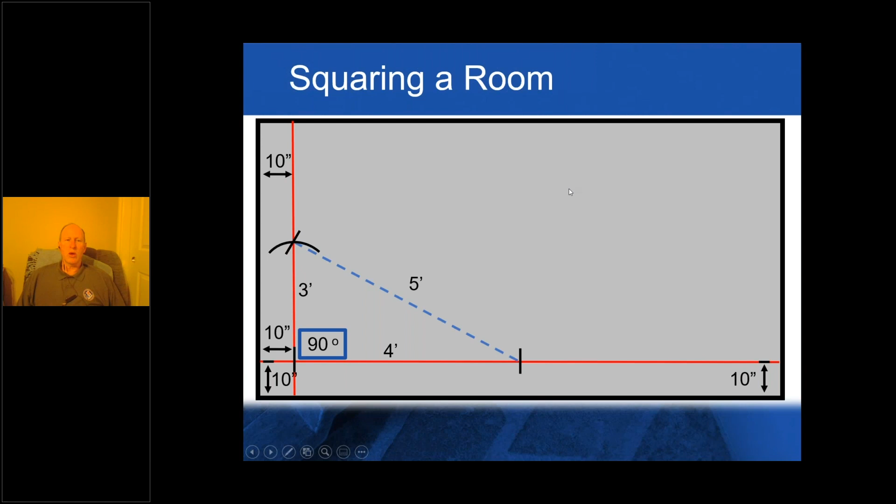Now, if this was a huge room like a mall, it could be 30, 40, 50, or 300, 400, 500. Or 6, 8, 10, any multiple of 3, 4, 5. Usually you want to go the biggest multiple you can fit. You don't want to go 3 foot, 4 foot, and 5 foot if you've got 100-foot long lines going in both directions. You want to get as far out as possible, and that'll make you even more precise in your lines being square. So now we've got our line square, and we can measure off of that square line.

So we checked down that short wall when we made our very first 10-inch marks to make sure that wall was straight. And guess what? That one is nice and straight. When we measure across the room from both ends, that wall is 84 inches. Then we can do the same thing off of the other 10-inch mark, measuring from short end of room to short end of room. At the top, we're 119 inches. And at the bottom, we're 120. That's an inch difference. If that worked out full tile at the top of the room, and we worked our way back towards this bottom right-hand corner, we would have a 1-inch sliver.

It would start off as 0, and we would start off with little slivers getting bigger and bigger till a 1-inch sliver. That would look horrible, because what we're looking to do is we want to be centered and balanced.

So how does this help us? We know if the room's square, we can adjust our cuts to make sure we have equal size cuts on both ends and both long sides, keep our cuts equal, keep our cuts balanced.

So if you were to come up with a 1-inch cut at the far end, obviously we would need to shift our pattern. If you had started with a full tile and ended up with a 1-inch cut, say this was a 12 by 12 tile, all you would have to do is start with a 6 or 6.5 inch. And when you got to the other end, guess what? You'd have about a 6 or 6.5 inch down there as well.

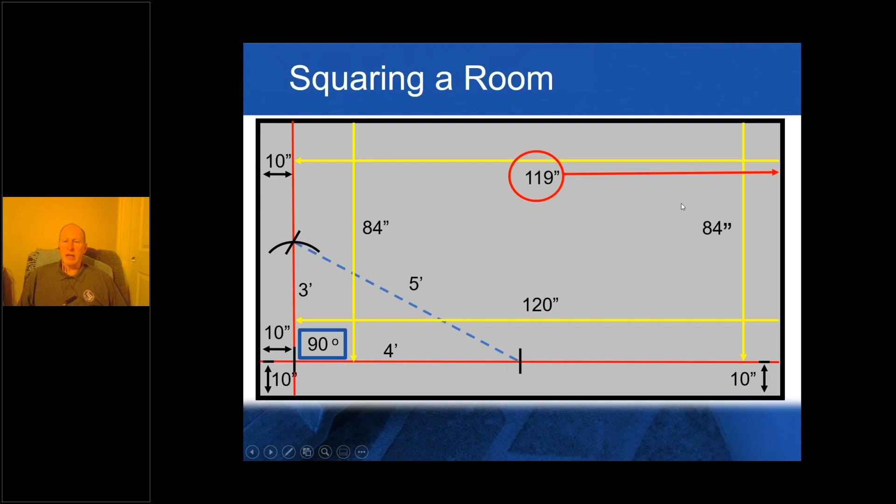Then you would be centered and balanced, and that's per our ANSI standards and our TCNA handbook. Those are the industry standards for when we do our layout. It needs to be centered and balanced.

So that's also a good way to make sure that our laser is working. We can check our laser, make sure it's still focused and shining at exactly a 90-degree angle. Because sometimes if you trust it every time, as you start to lay tile something's not quite working right. Maybe the laser's been dropped, the helper dropped it and surprise, they didn't tell you about it. So make sure that every once in a while, you check your laser.

So if we're going to use a laser, we've got to make sure we have our charger with us. Many times you need batteries, extra batteries. So you get out to a job, guess what? You don't have any more AA batteries in the truck. So now either you're not going to use your laser, or you're taking a quick run to town to go pick up some batteries. Time killers.

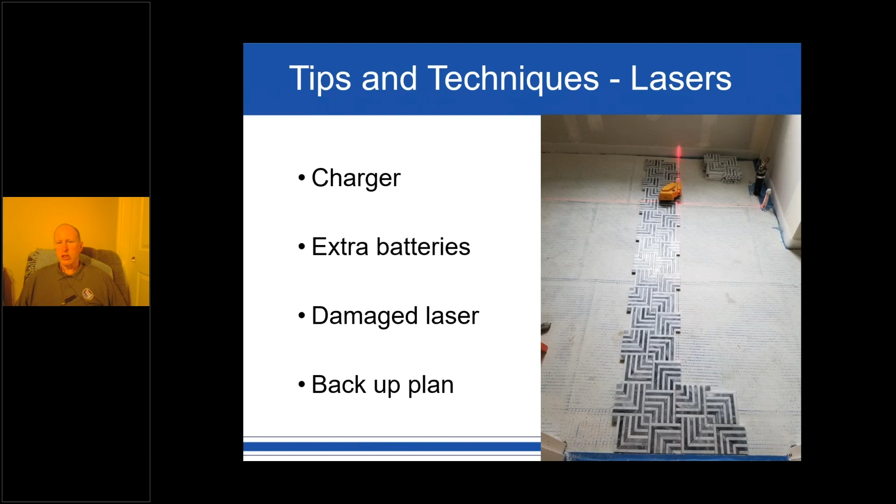What happens if the laser got damaged? What's your backup plan? Well, that's what the 3-4-5 method would be. That would be your backup plan and a way to check your laser. You'd use your 3-4-5 and you'd be able to snap out your lines.

So we need to make sure that we square up a room, establish our square, make sure everything's straight, and then we work from there. That's how we check rooms out.

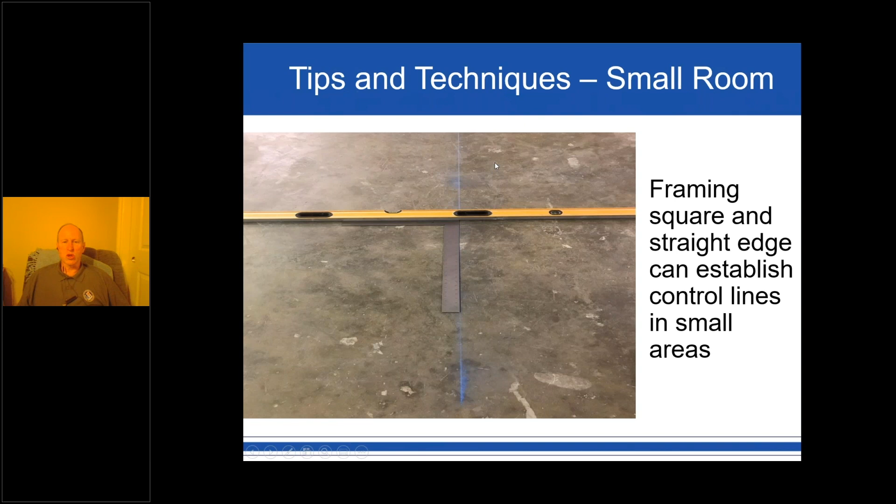If we made our lines in the middle of the room, like I was talking about earlier, and then laid our tiles, say this was an 8'6" by 8'6" room, if you started dead middle and laid 4 full tiles, you'd end up with a 3-inch cut. Well, back to our standard: what's our standard? Half or larger. So what would you do?

Now, sometimes it's going to get more difficult depending on the configuration of the room, how many different walls, hallways, and things like that you have to deal with. But this is the standard we work from, and we try to balance our layout the best to give us the best look overall. So that's the way we can do that.

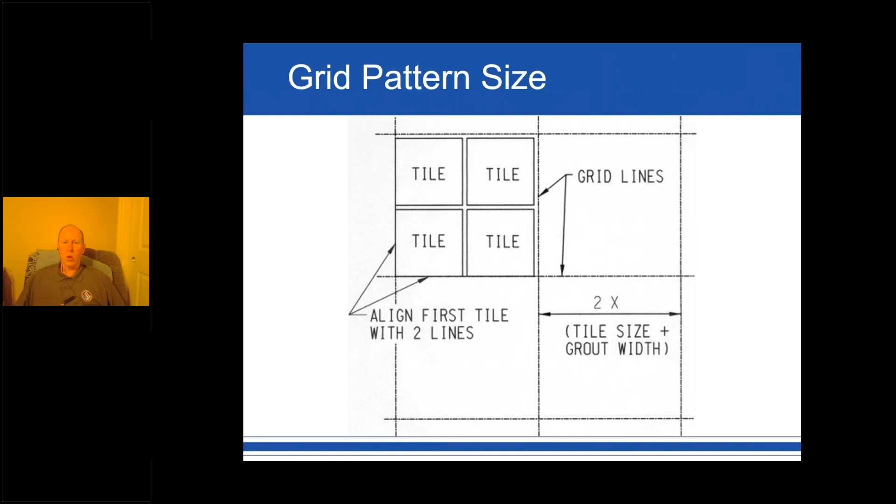Sometimes somebody could go through and mark a corner, mark an X in the corner of each one of the grids, or at least in one of the corners in each room, so whatever tile setter goes in there knows what corner to hit.

Also, you want to make that grid a size you can reach. 24 inches is a good distance to reach - not too far. You can get up to 30; 30 is not bad either, but that starts to push it.

At 30 inches, that's a pretty long reach, especially if you're trying to reach that far piece, press it down, and collapse the ridges so we get 95% coverage. If you're reaching out that far, that can be a pretty stressful day working at that kind of distance.

Measure off the long wall, 2 feet, all the way. That depends on whatever tile you're using. As we see in the top picture, it's measuring from the edge of one tile to the edge of the third tile - so it's 2 tiles plus 2 grout joints. That's the size of the grid.

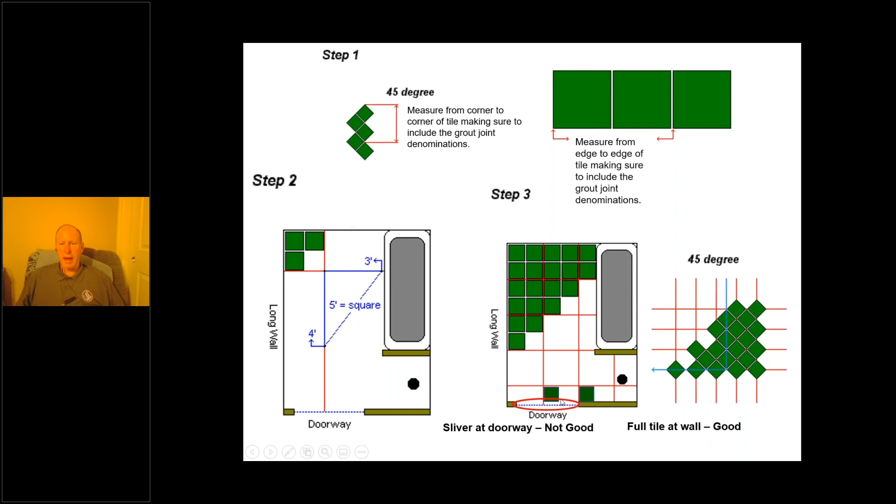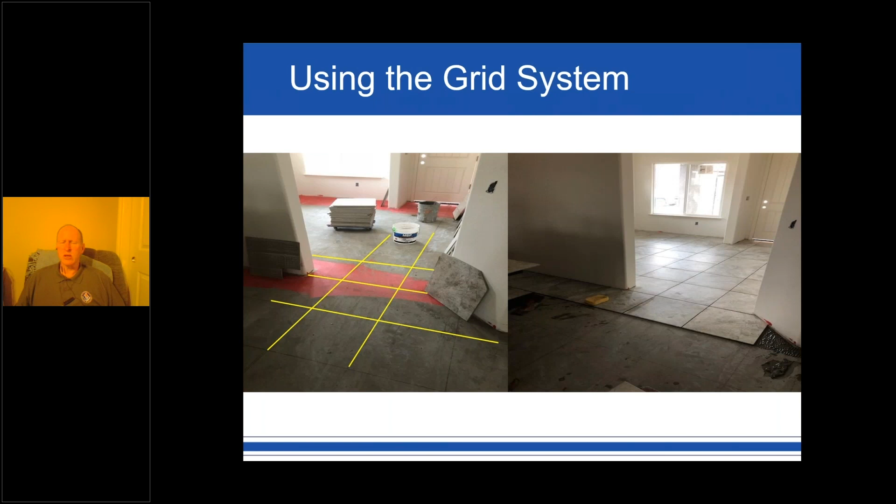And if you happen to get to one place that's really visible and it's a really ugly cut, you can then go back and make some adjustments in your layout before you start laying tile, instead of coming out and saying, oh my, what did we do? How do we fix this now? Most of the time, it's a very difficult proposition once you get into that. So that's how a grid system can help us.

It does not look good. But with the grid system, with everybody hitting their chalk lines in the right direction, they're able to go through, hit the right corner, and then they tie in. Everything lays out perfectly. Other advantages to the grid system is once you snap out those lines, your finisher or helper can go ahead of you and pre-cut every cut in that house before you get there. So when you're in a room laying tile, you're not waiting for cuts to be made.

Those cuts are there. If they had been cut on a wet saw, they've already been cleaned and dried. So by the time you get there, they're ready to install. It's going to make you faster. If you were to be laying tile in here and trying to use spacers, sometimes it would be difficult to come in here because you don't know where you're at yet until you finish the one room and bring your row of tile around. Very easy to get out of square.

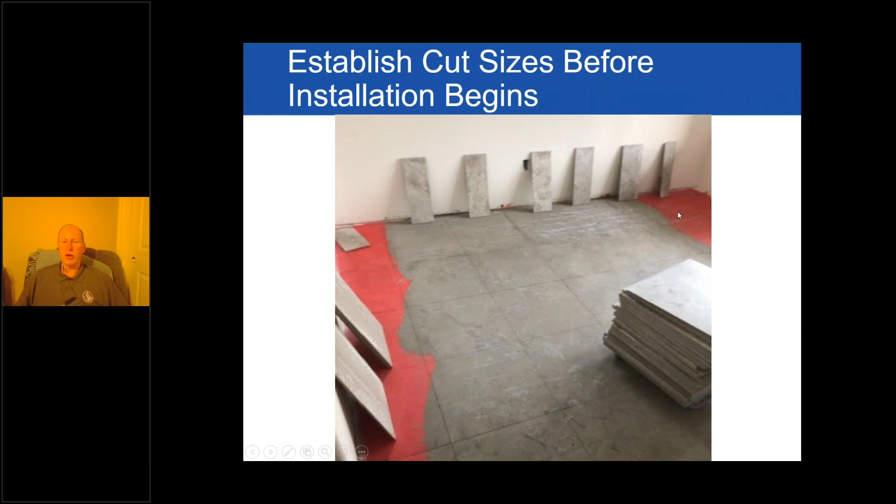So that's some of the great advantages to using the grid system. When you snap out ahead of time, you'll know every cut before you begin, and it's simply a much better way to install tile. You can have, like I said earlier, multiple installers working in the same area. Everybody's going to work to the line, and as long as they're working to the same line, everybody's on the same page when you're done. Everything ties together nicely. No grout joints start having that stair step as you look down them. So a very good way to install tile.

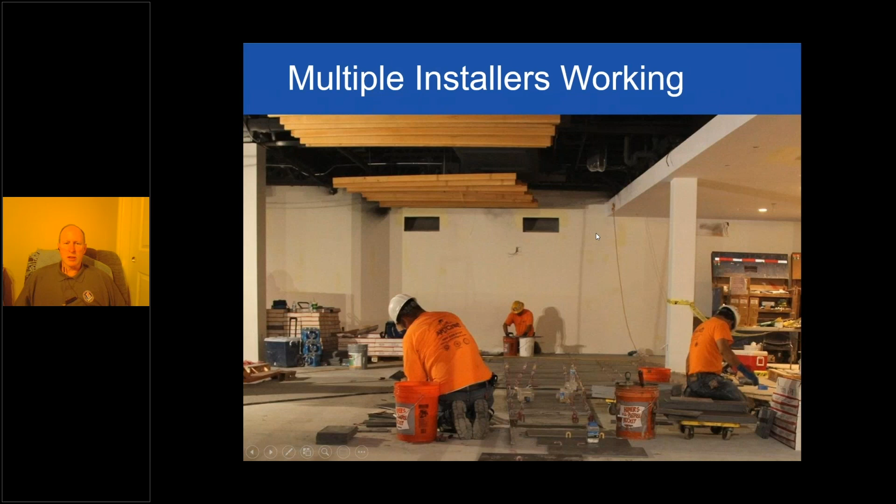We would then measure and find the center of our wall. If the center of our wall gives us a good cut on both sides, half or larger, then we would plumb a line there, make a vertical line. If we're vertical and plumb and horizontal and level, then we're square. So that's the exact same thing that we were doing with the 3, 4, 5. You could, in theory, do the same thing on a wall.

You could measure over 3 foot, 4 foot, and then 5 foot, and then square. Yes, you could in theory, but simply if you're plumb and you're level, you are going to be square. So if you do that, you have your center point. You're then able to start laying tile. If you start from the center, you don't want to go all the way up, and you don't necessarily want to go all the way horizontal.

You want to kind of work it in a stair-step pattern so that you don't get locked in any one direction. If you stack this half of the wall, say you started here on this back wall, and you stack this from the ledger board all the way up, and then you came over and started the next course, maybe you're out of some different boxes. All it takes is just being off the slightest amount, and we can start having problems tying in.

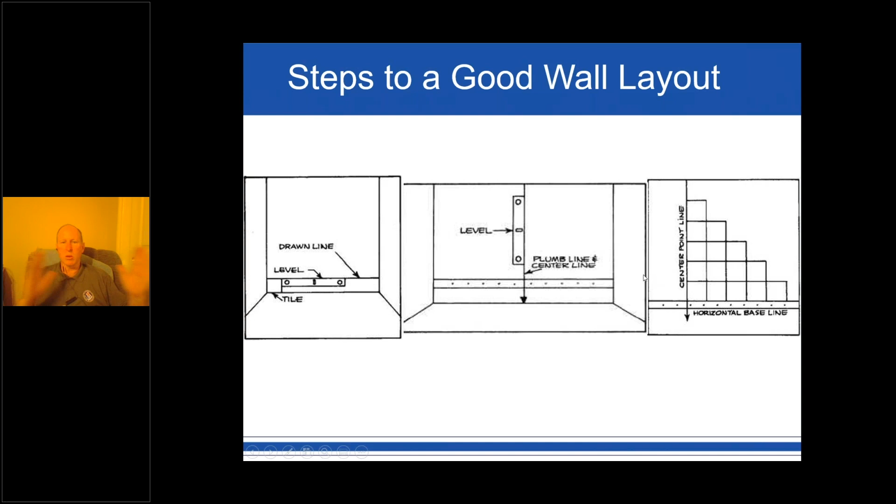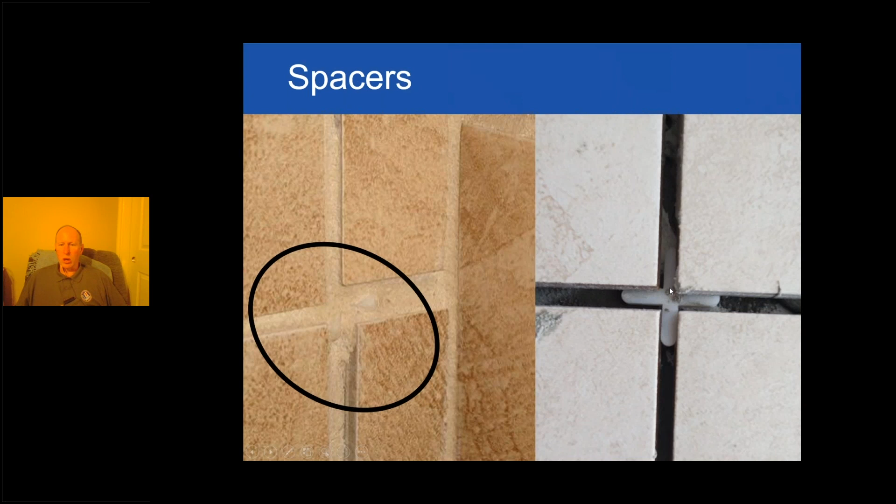And if it's a dry area, it's 80% coverage. Those ridges have to be collapsed in our thin set, so we need 80%. And if it's a wet area, that's 95%. So we have to make sure that we don't let spacers get in the way of doing our work properly. And that's exactly what you see going on here. So how do we properly use spacers? Well, here's another example of how we can use spacers.

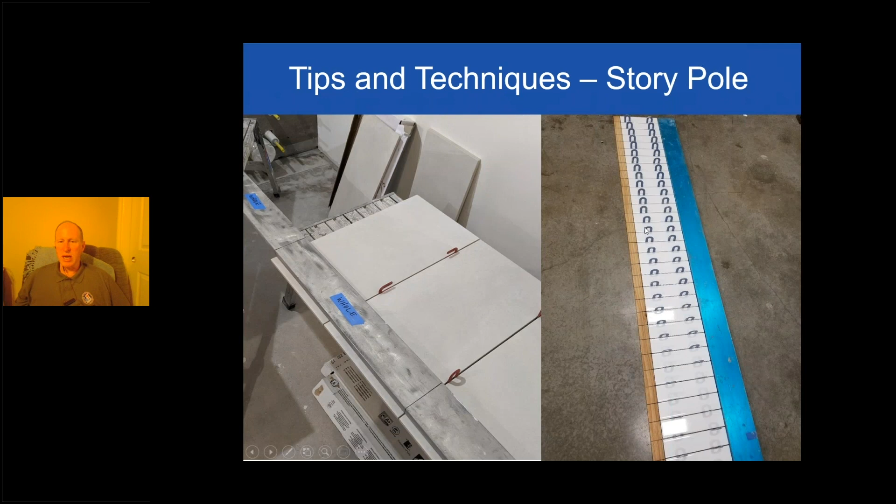Use a straight edge, stack your tiles against it so you're nice and straight. Put your spacers in that you're planning on using, and here's an example of using something as simple as a float strip, and then marking the float strip at every joint, and then we could use that float strip, go around the room, and we would know exactly what size cuts we would have top and bottom or side to side, depending on the direction this tile hits.

Now, what am I talking about? Let's look at it in practice here. Here's two guys, they're using a laser and a story pole together. With the laser, they would have established where the high point or the low point of the room was, depending on their bottom course that they're trying to set. And they would then measure where they want that tile to start at. And then they could use that laser and story pole, go through and mark.

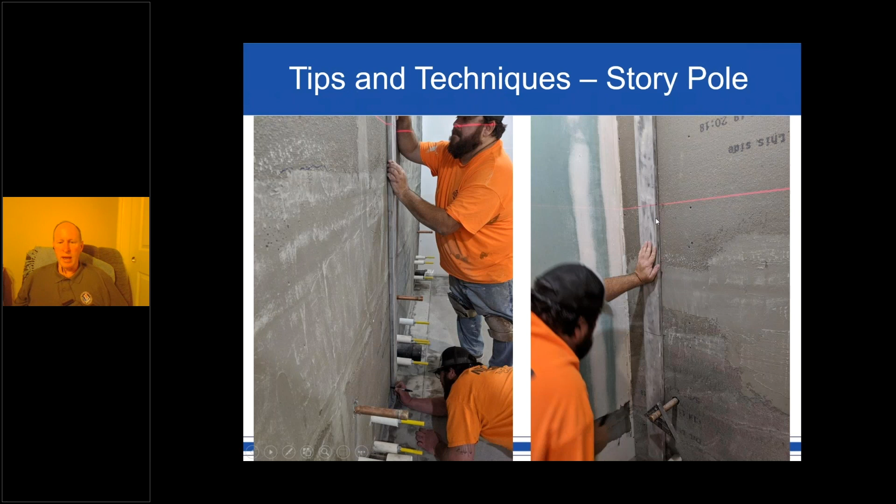And now they're doing a grid system. Every 2 feet or every 2 tiles, you notice, they will have a mark. They'll be able to snap in a grid all the way around that room, and then they can go through, spread their mortar, install their tile all the way around that room using the grid system, using a story pole and a laser to keep them straight and level, as well as plumb.

So when we do things like this, if we take the time to do our layout right, when we get to patterns, such as the examples that you see here, patterns can cause some people some problems. Spoke with a nice lady today. She had some issues with the tile pattern. And where was the problem noticed? At the inside corner. Spent a ton of money on this tile, and he did a bad job on the inside corner. That was the first thing that was noticed. And then it revealed other problems about the installation.

But if we look at the picture on the left, that's a fantastic job. That pattern just folds nicely through that inside corner. You almost can't even tell that that's an inside corner. Well, that's a folded inside corner. If we're laying this wall here on the left first and then the wall to the right second, we would make these cuts at where the intersection of the two cuts would be. We wouldn't take this cut all the way to the back of the substrate, because the piece left over would be too much smaller and the pattern wouldn't fold nicely as it does here. So that's basically a 45-degree angle, those two cuts meeting up in the corner, and then we would leave room for a silicone or a sealant joint in between that.

On the right, it's the same type of thing. It's a 12 by 24 tile. So with a 1/3 offset, that's our maximum offset. We should be setting a 24-inch tile at a 1/3 offset because it's over 18. So a 1/3 offset would be our maximum offset, is the recommendation that we have. So if this is a 24, we ended up with a 16 here and an 8 up there. The leftover of the 8 is a 16, and the leftover of the 16 is an 8. So we would fold that inside corner and continue. That would start our pattern for our next wall. So that's an example of a folded inside corner.

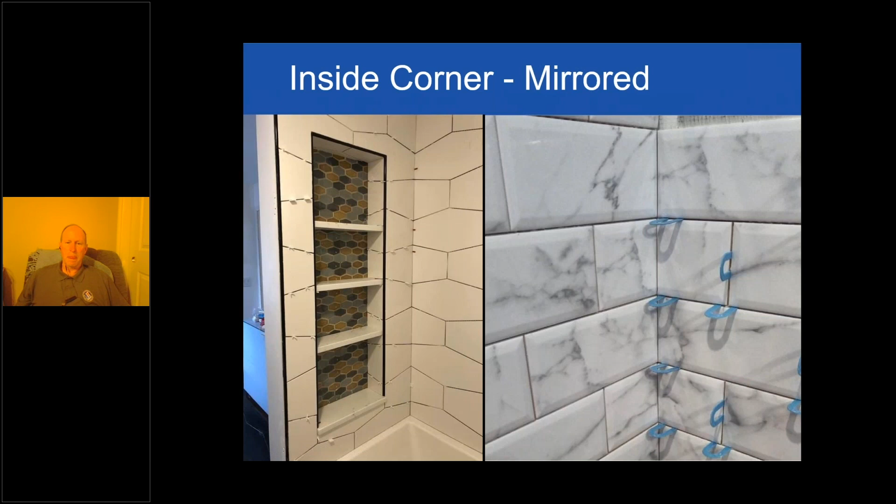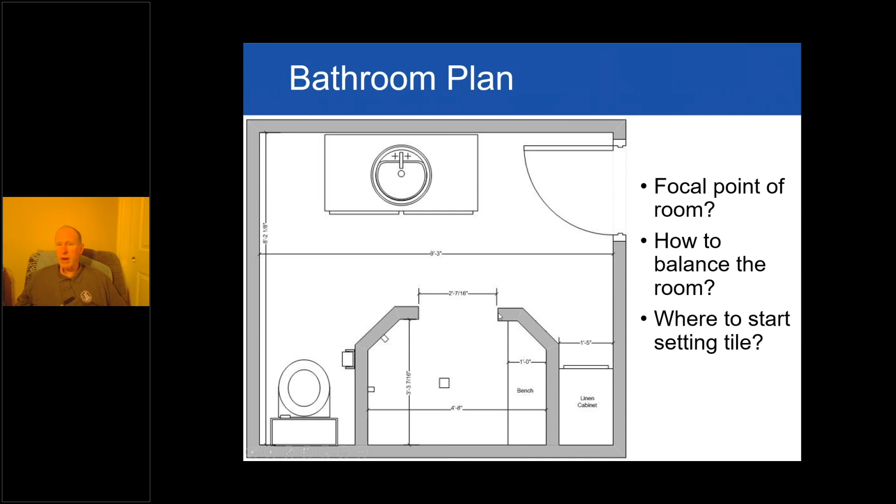Because sometimes you might want to have full tile everywhere. That's simply not going to happen, especially with these neo angles. So there might need to be trade-offs, especially, as we've seen in some of those previous pictures, depending on pattern. So we want to make sure that we have that discussion ahead of time.

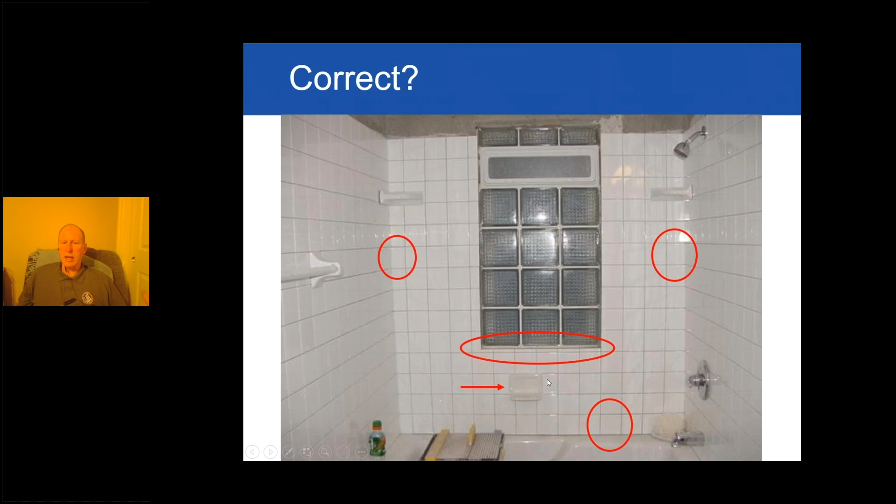But you notice something else that kind of catches your eye. How about that soap dish? See, that window is somewhat in the middle of that wall, but if they had moved the soap dish and centered it under that window, that also wouldn't be an eyesore. So any number of different things we need to consider when we're doing a layout.

Tile thickness can be considered, the color range, even grout joint sizes, all of that. Here's my idea. And so instead of just starting and finishing the house and then them walking in: oh my gosh, that's not what I thought this was going to look like.

That's not the time to do it. A mock-up establishes all these things. It establishes the pattern, all these different variables, and it establishes your standard of work that you're going to deliver throughout the house. Because if you start this way, you can use this. This is my standard. This is what I'm going to give you through the rest of your house or building or whatever the case may be.

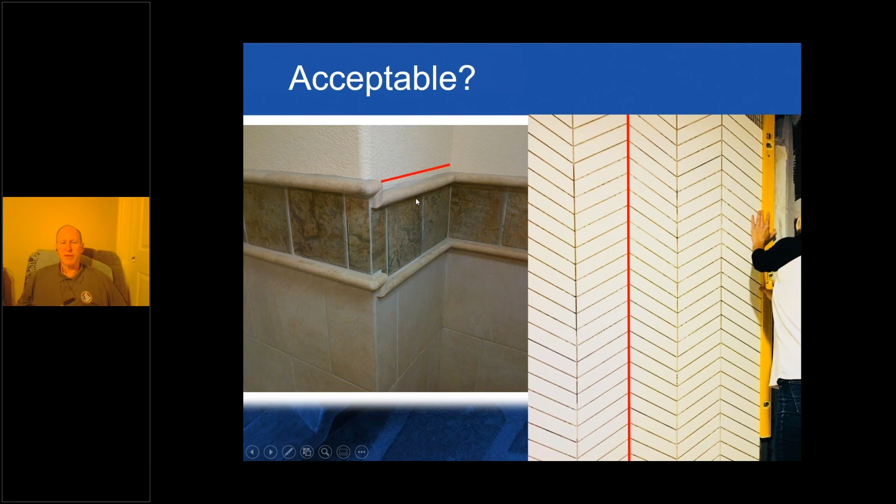So we can see if you do things right, it looks good, like the lady's doing on the right-hand side, making sure she's following her pattern, keeping herself plumb with the laser and with the level. A nice looking job. And the other picture, obviously, that's a horrible example. Probably two guys started at the far end of the room. One went left, one went right, and when they came back and tied in together, maybe their levels weren't quite on the same page. And so they had this creative way to do it, but it's definitely an eyesore. So we don't want to do anything like that or have things that look like this. Oh, this is horrible.

So if we're doing layout, we need to figure out who's making the decision. If it's a large job, a lot of times an architect or designer, send them an email. Where do you want the layout to start? How do you want the layout to proceed? Could be the owner, could be the general contractor, could be the builder, but sometimes it could be you as the tile contractor, as the tile installer.

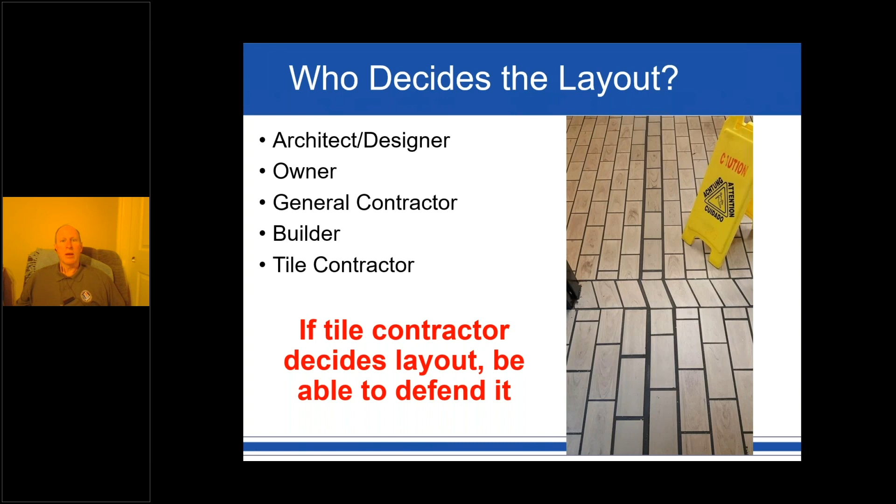The only question is, if these other people aren't making the decision and you are, you have to be able to defend your layout. If you come up with a floor that looks like this, and that's what you gave me for a floor, or maybe this was my rec room, that's a wreck right there. You would be ripping out half of the tile on that floor and fixing it, getting rid of that ugliness in the middle of the floor. So if we're making that decision, we have to be able to defend our layout. We need to be centered, balanced, and make sure we're using the right type of corners on the inside, so we have a good looking layout.

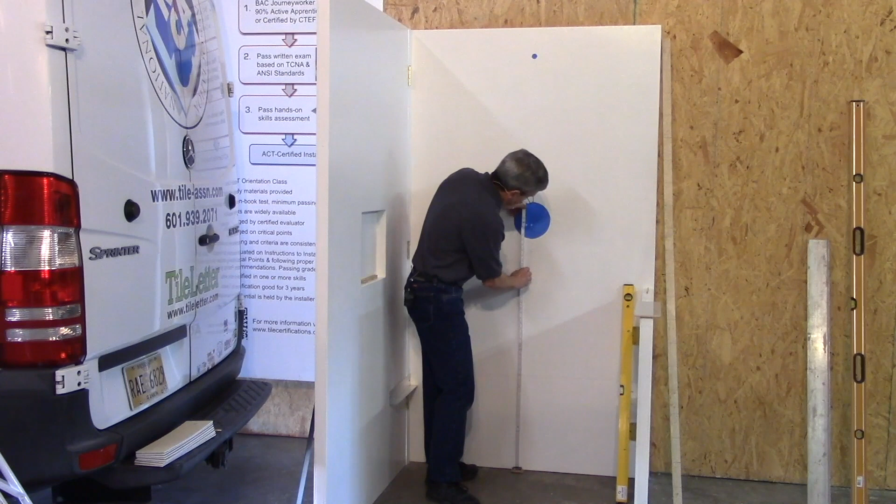So you've got to be done listening to me talk. Let's watch a few videos. We're going to see something that might seem as simple as a shower. How difficult can that be to lay out? Well, let's take a look as Mr. Scott Carothers helps us lay out something that might look like a simple shower. Let's see some of the challenges that can come from that.

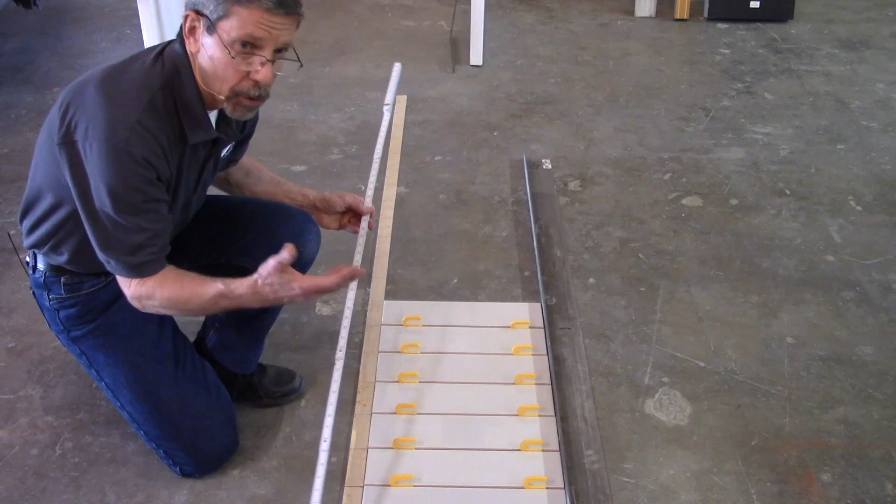We've been learning about layout throughout this program. Now we're going to learn how to lay out a stall shower so that we're plumb and level, and that we have balanced cuts left and right, and also top and bottom. When we do our layout, we could use a measuring stick or a measuring tape to determine what our line is going to be, including a tile and our grout joint, in this case using a 3/16 inch spacer. We can do that, but when we get into all those 16ths, sometimes it gets a little bit confusing. So what we can do is make a story pole, which is really nothing more than a wooden stick like a lattice strip, and we're going to lay that down.

We're going to put our tile against our straight edge and line this stick up along the edge of the tile. So we have a tile and a grout joint, tile and a grout joint, and every time we have a line, that's the top of the tile. So there's 1, 2, 3, 4, 5, 6, 7, 8 of them, and we did that the whole length of our stick.

So that when we transfer it to the wall, once we're in there, we don't need to do anything with the measuring stick as far as our layout. I'll show you that next.

Now we're going to determine our center point. Our wall is 83 3/8 in height, and half of that is 41 11/16. I already have my tile and my ANSI requirement for a 1/4 inch movement joint at the bottom, and I put a piece of cardboard under there to simulate the thickness of the thin set. So I come up off of there 41 11/16, and I place that mark right here. This is now my center line.

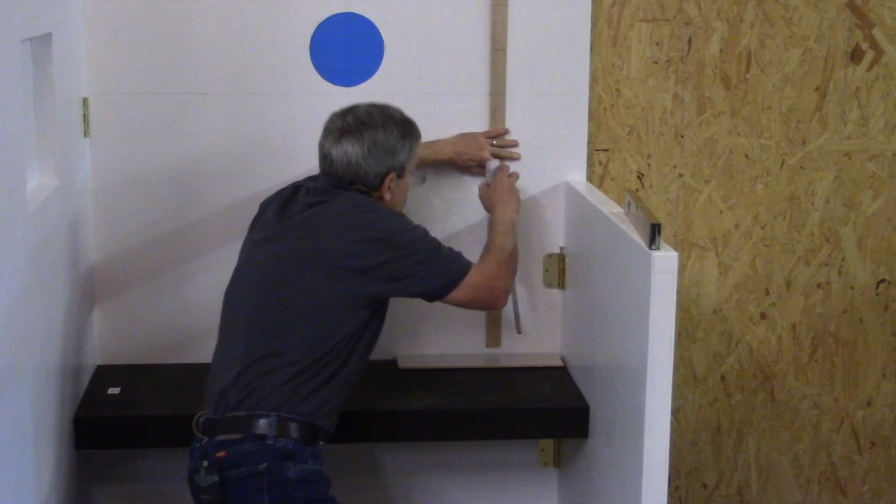Now we want to check and see if we have an appropriate piece at the installed tile. So I have a piece of tile and cardboard. I measured down from my story pole, and I am at 11/16. Now I want to move to the front of the bench to see what my cut would be in that place. So I measure down from my level line, and I am exactly 1 inch. That means I'm going to have an 11/16 sliver here and a tapered sliver going up the bench, which is not acceptable. We can fix that in one of 2 ways.

Second way we could do this, we could leave the bench in place, laminate another piece of foam board on top of it that would be 1 inch, waterproof it properly, and we've solved the problem. So now we're ready to set tile.

But first, we've got to determine the size of our back wall. So we're going to measure this back wall. It's 46 1/4. So we're going to come over and divide that in half, and our half measurement is 23 1/8. So I'm going to strike a line at 23 1/8, and that's our center line.

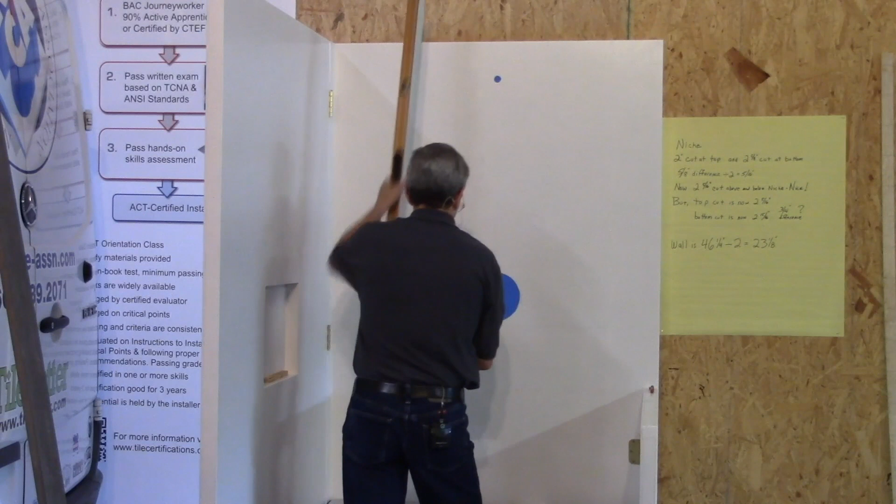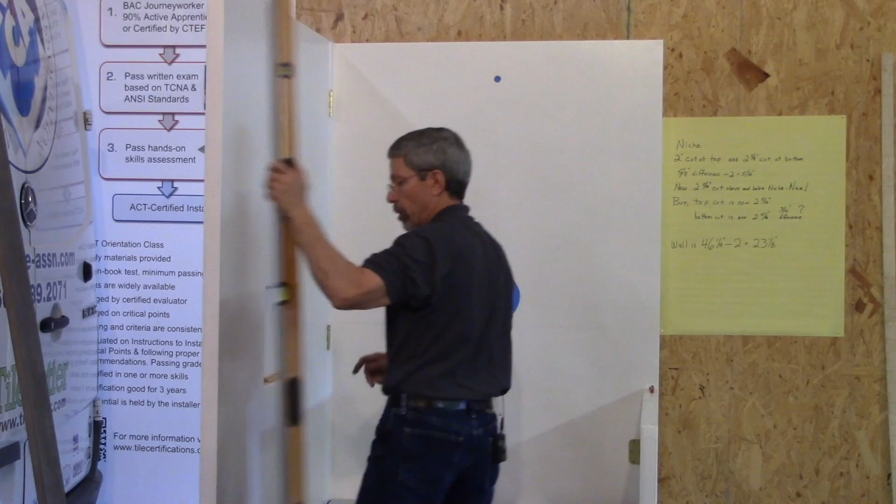I'll take my level and get a nice line established here that's going to be perfectly plumb. So we now have our actual point where we're going to start tile.

So I've made some faux tile here because these are easier to put up and put in place to give you a little bit more of a visual. So at this point, we have our new center line, and I'm going to start off of that center line, allowing my 3/16 grout joint, because that line is actually my key line for my first row of tile. So there's my 3/16 joint.

I'm going to come in and I'm going to do that 1/3 offset, allowing for my grout joint, 3/16 grout joint below. And if you wanted to, you could strike a new lay line to create the edge of the tile, but that's up to you. I always use my center line as the center of my grout joint. So now I'm going to work to my next one, stack it up at that 1/3 point again, and if you need more vertical lines, you can certainly add them with your level.

Let's run over this way and see what we get. There's my 3/16 grout joint. I've got my 3/16 grout joint. I'm now right on my original lay line, my level line. I install my last piece in this series. I've got my grout joint. I've got my 1/3 offset.

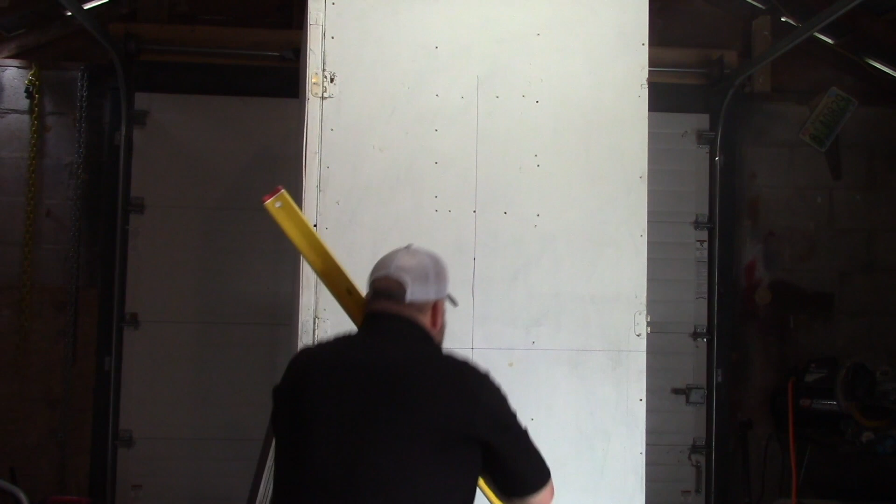So here's the center from top to bottom and left to right. That's going to be our starting point. Next, we need to center our tiles, put center marks on our tiles, and look at the two different ways to lay it out, and the two different options we'll have when we lay this out that both give us centered and balanced results. With this herringbone on a 45, it gives you quite a bit of difference in appearance, especially in a small wall like this that might be an accent area. So let's do that next.

Now we've got to find the center of this tile. This tile is 36 inches long, so we know that 18 inches is going to be half of 36 inches. We'll go ahead and mark that, and as always, we check it in both directions to make sure it's where we want it to be. Then we're going to center it in the short direction. It's 6 inches, so 3 will be our center this direction.

So there's the center of our tile. You see that? Now, because we're laying this on a 45, we can use our speed square, and we can just run it through the center of that X, in both directions.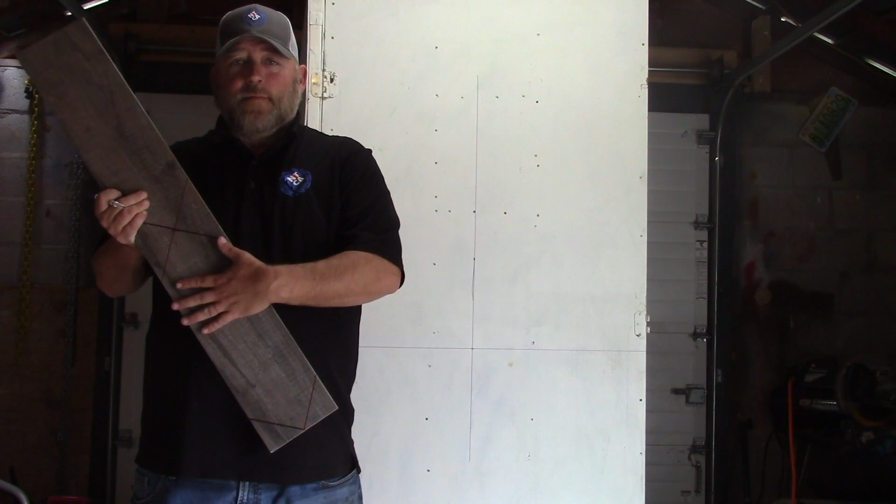All right, guys, we've got our mark on our plank tile right in the center. I just showed you how to get that. Now that we have our center mark on the wall, and our center mark on our tile, we're just going to line those two together.

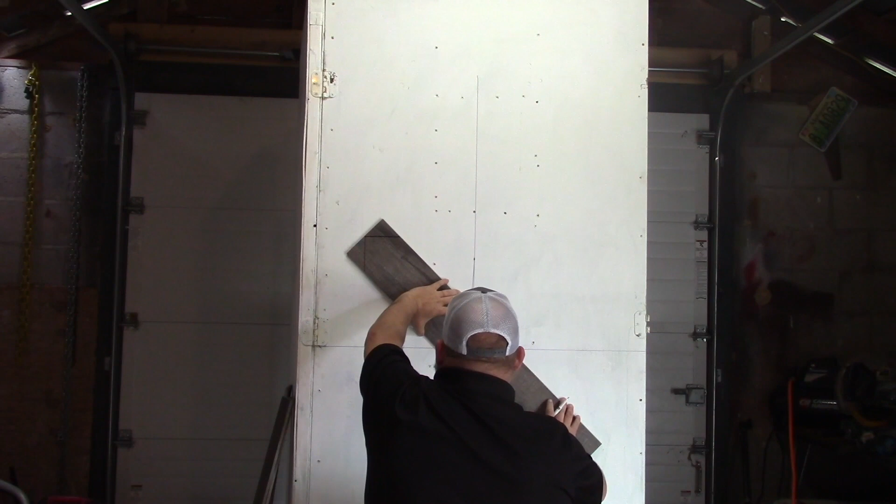So basically I'm lining one of the two lines in the X with the plumb line and the other line with the level line. And once I get them located right where I want them, I can now mark around the tile, and that's going to be the location of our first tile in the installation.

We actually could take these marks off this first tile and create a chalk line as a reference line, and from that chalk line, if we were doing this on the floor, we could grid out the entire floor using this as our reference of where we wanted to start.

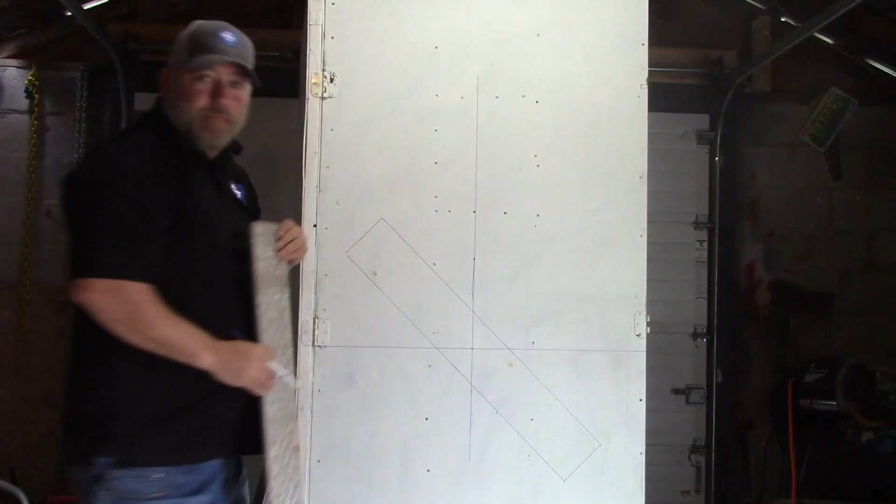So quick review: we found the center on our area where we're going to install tile, we found the center on our tile, and we've just lined the two up. Once we line the two up, we've traced around that tile to give us a starting point. So from here to here, we could actually create chalk lines and do a grid pattern using this first line we get. This gives us our starting point if we want to center this way.

Now, if I have an accent wall like I have right here, and I just want to lay it out and get some idea of what the cuts are going to look like, an easy thing to do is just to dry lay and mark around the tiles to see what your cuts are going to look like.

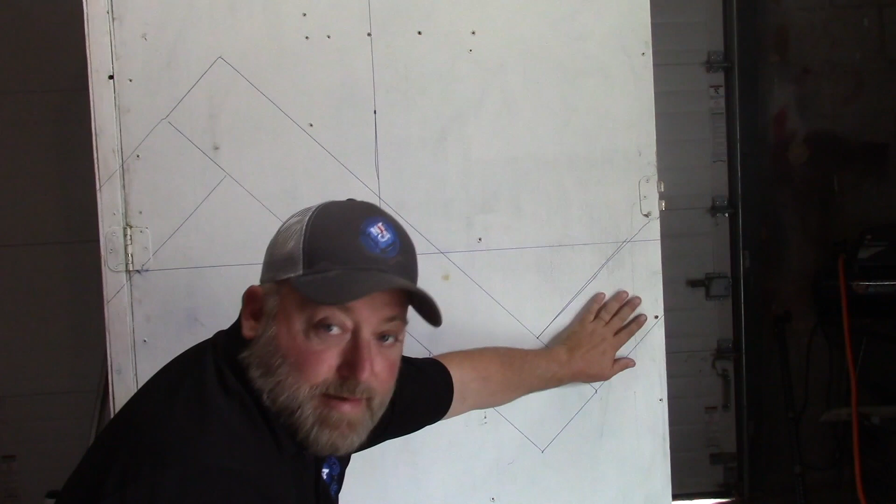So these are identical in size, they're reverse images of each other, but this is a balanced layout. And this layout shows the entire herringbone pattern. The next layout I'm going to show you has a completely different look. They're both centered and balanced, but this is one that you definitely want the designer or the owner to look at both options to see which one they would prefer.

I'm going to take some time and mark out where every tile goes on here, and then I'll show you afterwards, and that way you can make a decision. You can look at your cuts at the top and the bottom and then lay it out the other way and see which way works best.

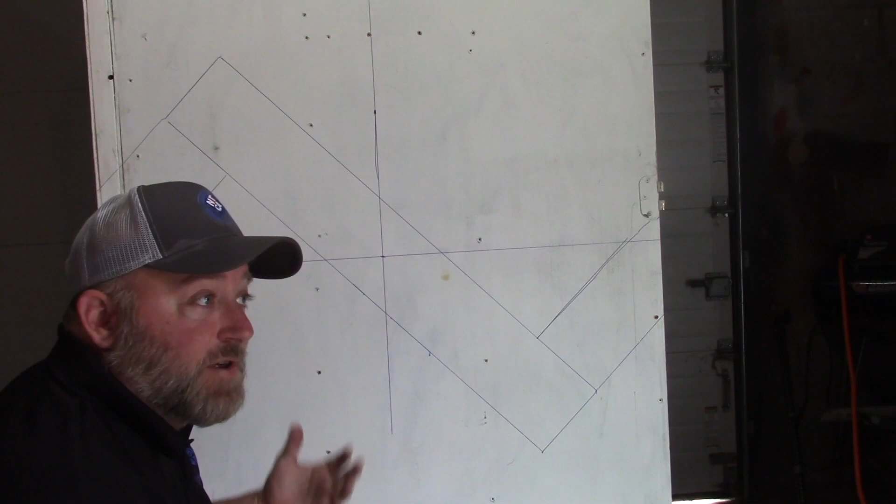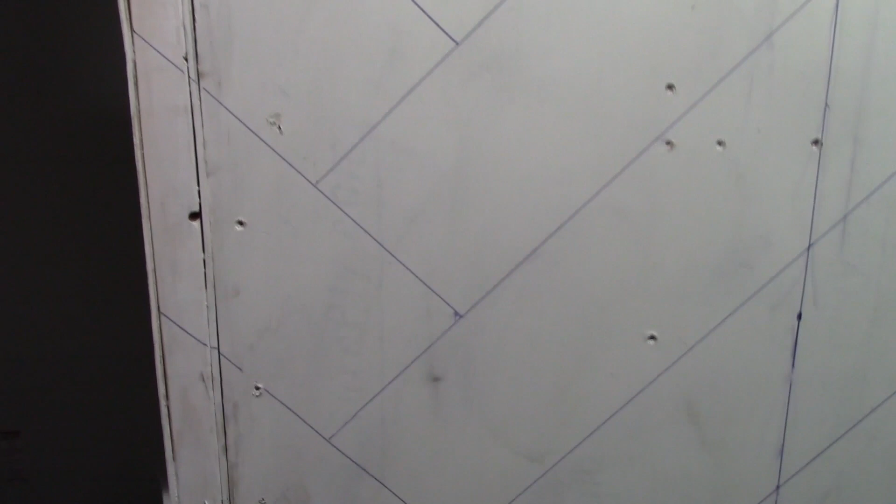Guys, we got all of our pieces laid out for our mock-up doing herringbone on a 45. You can see where we got our center mark, level and plumb, and if we look at our cuts on each side, they're exactly the same in dimensions. Another thing, these points that are coming down line up with each other and are the same distance as the points on the other side.

If you look at the top, we've got this little triangle up here. You see that little piece? We've got a matching one down here at the floor, a little piece. So everything's centered and balanced. You guys saw how we did that. We just centered a tile, and all the cuts are exactly the same size. Good way to lay everything out to make sure everything's centered and balanced according to ANSI, and see which way gives you the best result.

All right, guys, I just showed you how I laid out this herringbone on a 45 in one way out of the center of the tile. I'm going to show you another way that we can lay it out, which gives you a completely different look.

Remember, we've got our level lines and plumb lines, and one thing I meant to mention earlier but I forgot is once you get these level and plumb lines, that's your opportunity to check everything around. Make sure that the ceiling is level, make sure that the walls are plumb, and you can use these level and plumb lines to see what condition your job site is in, and if you need to do prep ahead of time. And you want to make sure and do that prep because it can really affect the outcome of your layout.

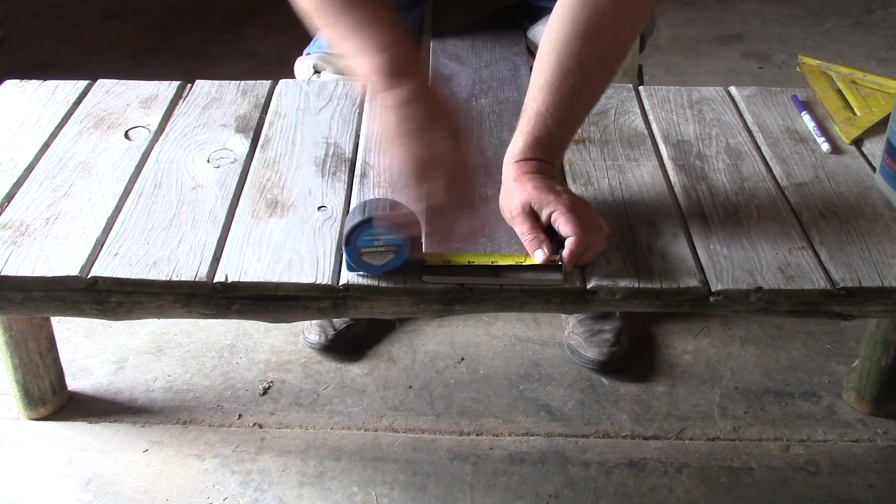You can also lay a center mark off the end. And the way we want to do that is we want to find the center of the end of the tile. And again, these are 6-inch tiles. So I want to mark that right in the center of the tile. Double check it. Then I can take my speed square from that center point and create 2 marks. Now if I were to set this level, this one on the plumb line and this one on the level line, that would give me a center layout for my plank tile installation.

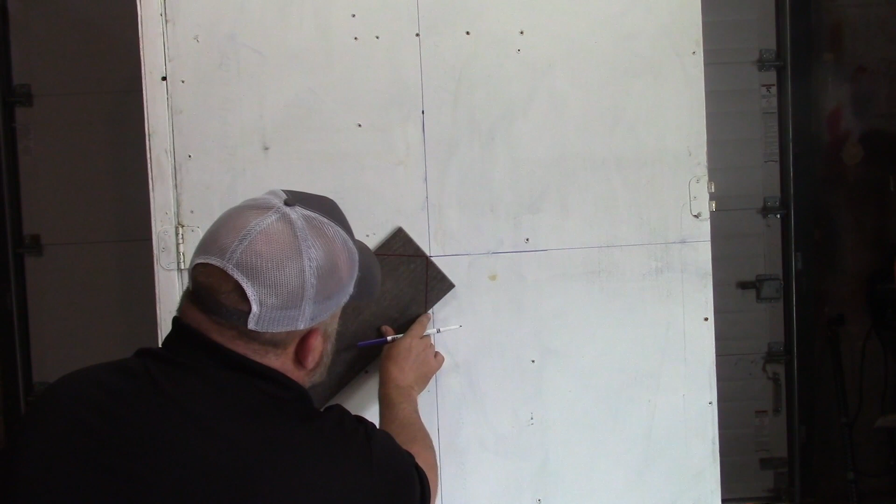So with this layout, I'm starting at the end of the tile, and you can see we're on a 45. I basically found the center of this tile and I made 2 marks at a 45-degree angle. I'm just going to line these marks up with my center marks that I have on my substrate here that I'm getting ready to tile, get them lined up. Once I do that, I can mark the location of this first tile. Okay, so that's going to be where my first tile sets.

Now, if I was chalking out lines, I could use this as a reference point, come off of these marks, and chalk a line and do a grid system. But because this is just a small accent wall, I'm going to lay this out by just drawing each piece on there to see what the cuts are going to look like.

So now you can see we got a basic idea of where each tile is going to go. I can go all the way through this from top to bottom, figure out what all my cuts are before I get started. Then I can show that to the design person, the homeowner, whoever makes the decisions, make sure they're aware of what they're going to get before you get started. This is another way to center, and I hope it helps you guys out.

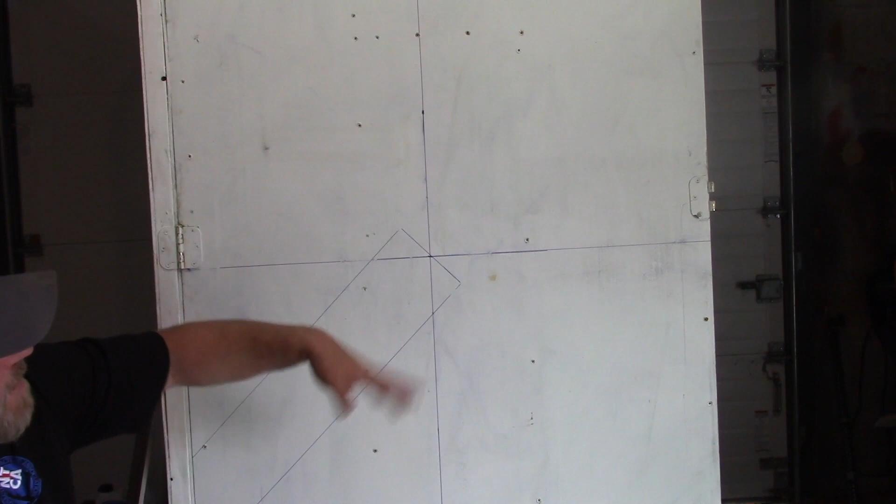Well, that was a very good explanation of how we can take something that could be as difficult as a herringbone layout, make sense of it, and then by doing that pre-layout like he was showing there, we could then show the homeowner a couple different options of how the cuts would look, and then they could make the decision based on what looks best to them.

This is a scale replica of the bathroom in the slide that we saw during our presentation. We have the toilet, we have the vanity, we have the doorway, we have the linen closet, and we have the shower. We're going to take a look at finding the focal point for this room and basing our layout on that focal point. This is the tile we'll be installing in this bathroom. It's an 18 by 18 rectified stone tile.

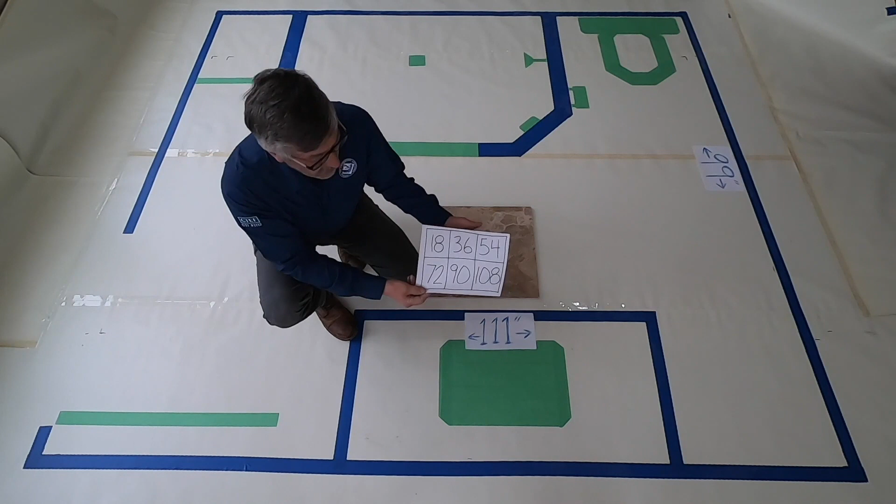Now, we're going to take a look at the focal point in this bathroom and determine the best layout based on the size of this 18 by 18 tile. Now, I know that the dimensions of this room are 111 inches in the long direction and 99 inches in the short direction. So what I'm going to do is take a look at multiples of that stone tile, that 18 by 18 tile.

Now, we talked about a story pole in our presentation. This piece of paper represents the numbers on a story pole or multiples of that tile: 18, 36, 54, 72, 90, 108. Those will be enough numbers for us to use our tape measure, just like a story pole, to determine the best layout based on a variety of focal points.

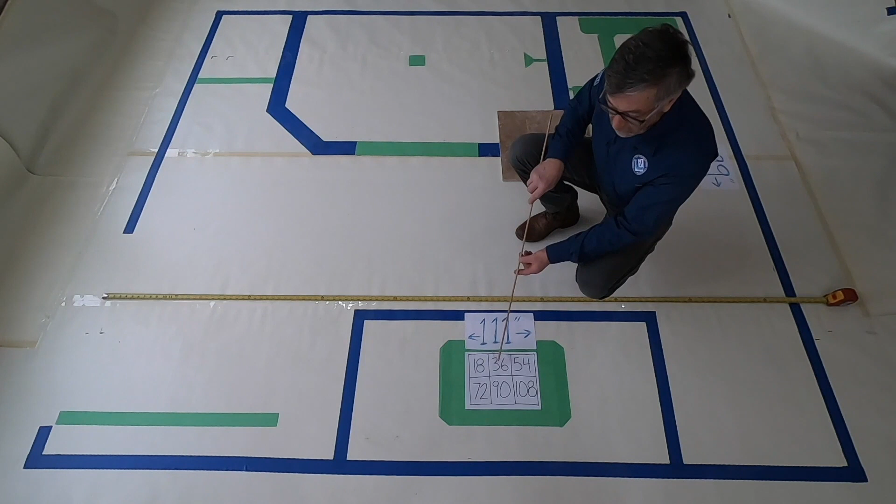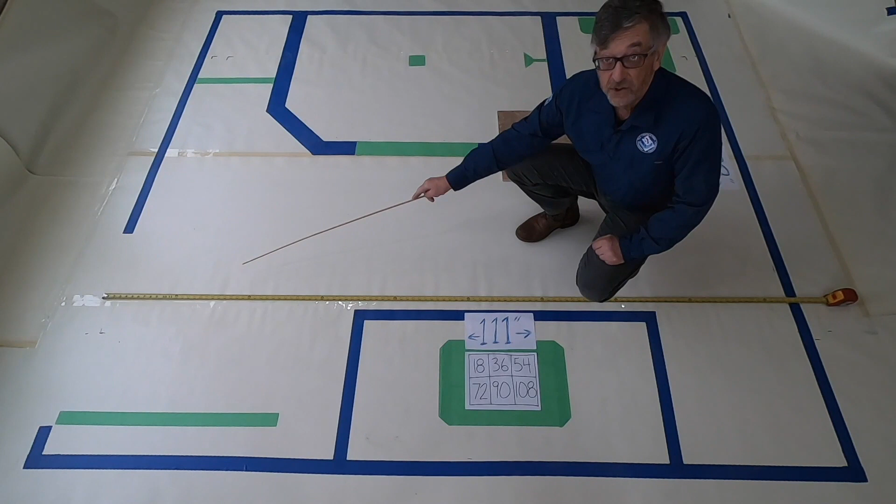So I have my tape measure drawn out to measure the room based on the tile size and based on using this chart of the numbers that we would place on a story pole: 18, 36, 54, 72, 90, and 108. And let's start with a focal point for a full tile at the entranceway. Here's 18, 36, 54, 72, 90, and 108. Well, that leaves a 3 to 4 inch piece, a sliver, at this distant wall.

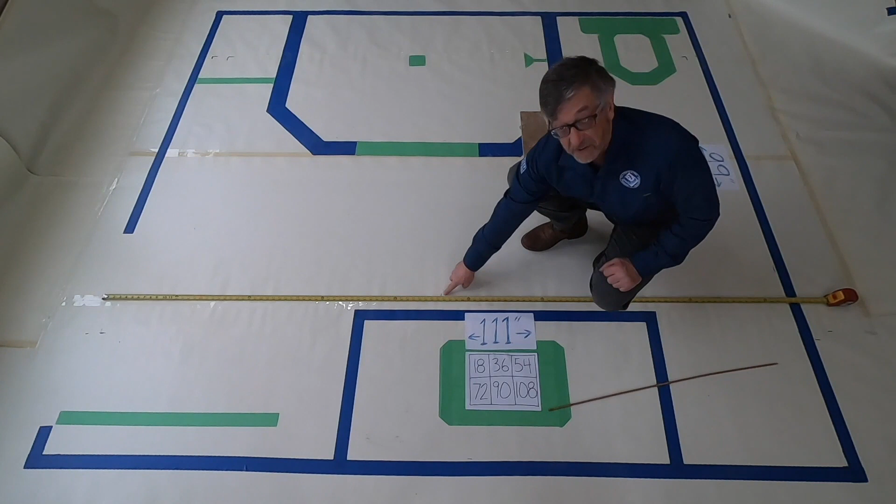And based on our ANSI standards, like we learned in our presentation, we don't want any tile less than half a tile wherever possible. Well, it's possible to not have less than half a tile here. So to make sure that we don't have a sliver over here or less than half of a tile at either end of the room, what we're going to do is place a mark at the center of the room at 55.5 inches, and we'll adjust our tile to see if it improves the situation.

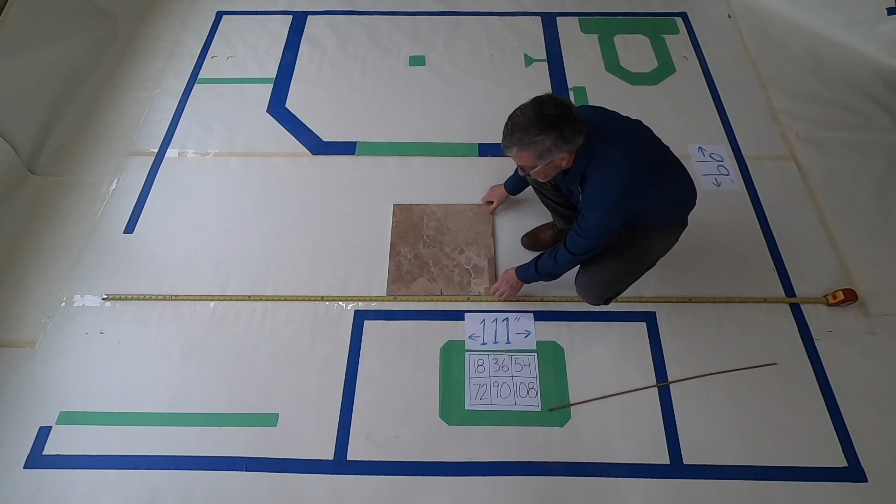Now, when we first measured for a full tile at the doorway, that was measuring for the grout joint in the middle of the room. But what if we shift our tile to the middle of the room being at the middle of the tile? What does that do for us? Let's take a look with our tape measure.

We can use it just like the story pole, back it up a little bit, and I'm starting at the 36-inch mark, and I can see that I have, from the end of my tape measure to the doorway, easily more than half a tile. That exact measurement would be approximately 9 inches. Well, that's half a tile. That's great. So this is a good layout in this direction. All right, now let's see how these measurements lay from the short side of the room.

18, 36, 54, 72, 90. Well, you know what? We have a 9-inch tile at the back of the room. That's pretty good, right? It's half of a tile, and it's back at the very back end of the toilet. Great, we've got pretty good symmetry now.

We've got about a 9-inch tile on the left, a 9-inch tile over by the door, a 9-inch tile behind the room, and we've got a full tile over here at the focal point from the toilet area, and the tile alongside the vanity. That looks pretty good as a full tile there as well. Okay, we're making good progress right now. Let's lay it out a little bit further to see how that looks.

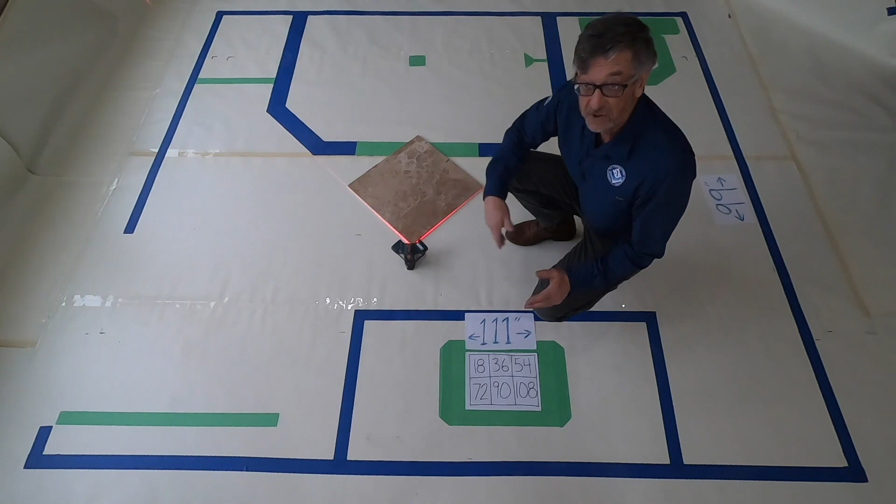Let's take a look at one more way to accomplish this. We did really well with the straight set options in both directions. We got a really good layout that I think will work good for this room, and it's very defensible. We can explain how we came to it. But let's take a look at one more way to lay this out. Let's turn this on a 45-degree angle or a diamond shape. See what that does for the room.

Now I went ahead and I set my laser so that it lined up with the neo angle of the shower wall. I brought in that 18-inch tile and aligned it to my laser just to get a quick look of how that shape would fit with the flow. Now that's a pretty cool layout, wouldn't you think? So let's imagine that this tile ends here at the curb, just like that. There's our cut. And let's take a look then at multiples of our modularity of this tile.

Now this is just a basic modularity again. We'll call this 25.5. That's without the grout joint. So a quick measurement in this direction tells me 36, 25. Yeah, I've got a good sized tile on the far end over there.

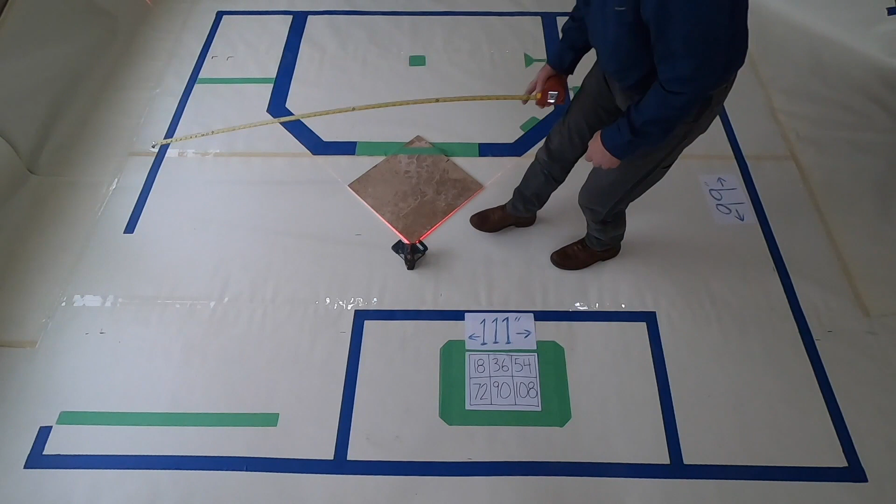Let's try it in this direction. We've got 49 inches, 49 divided by 25.5. That's 2 full-size tiles in that direction. The last thing we need to do is check this way, and a quick look tells me that I've got 34 inches, looking pretty good there.

And then back here behind the toilet wall, 38 inches roughly. We'll have another good set of tiles all the way around the perimeter. Maybe we'll have a few small point cuts here and there. We'll take a closer look at that when we grid out this floor. That will be the next step, no matter which way we go, to make sure that we set our tiles straight.

So the next thing I'm going to do is have a conversation with the owner. I'm going to tell them what I discovered in the room, and I'll give them the options of the straight set or the diamond set. Now, this diagonal set requires more cuts, more skill, more experience, and it all requires more time, which means more money. So there might be a change order to do that. We'll see what they want to do.

Wow, well, those were some very good pointers, very good information for us. Sometimes things that look simple are just not as simple as we might think. So you never know what you're going to get. So let's take a look back at what we have learned today. We need to find out what the customer wants, whether that's the architect, the homeowner, maybe the general contractor. Find out what it is. Do a mock-up, especially if we have a larger job. Get it documented that they've approved the mock-up. That's the standard that you're going to set your tile to throughout that job. So get that done, get it documented, and then move on.